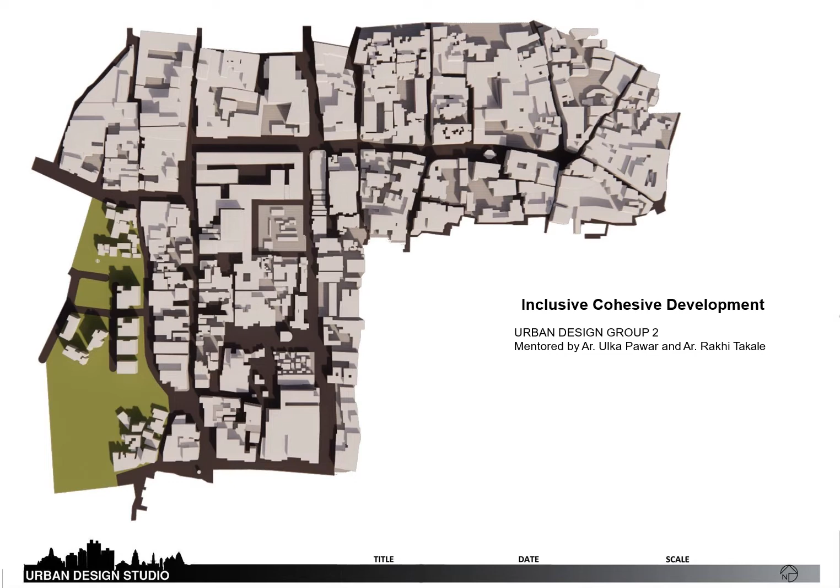Introduction. The site has a large cultural, religious, and social significance to the city. The activities that occur in the site and in the vicinity play an important role in binding the city together. The aim of this studio is to understand the existing city fabric and analyze the activities and the role they play in forming the existing nature of the site.

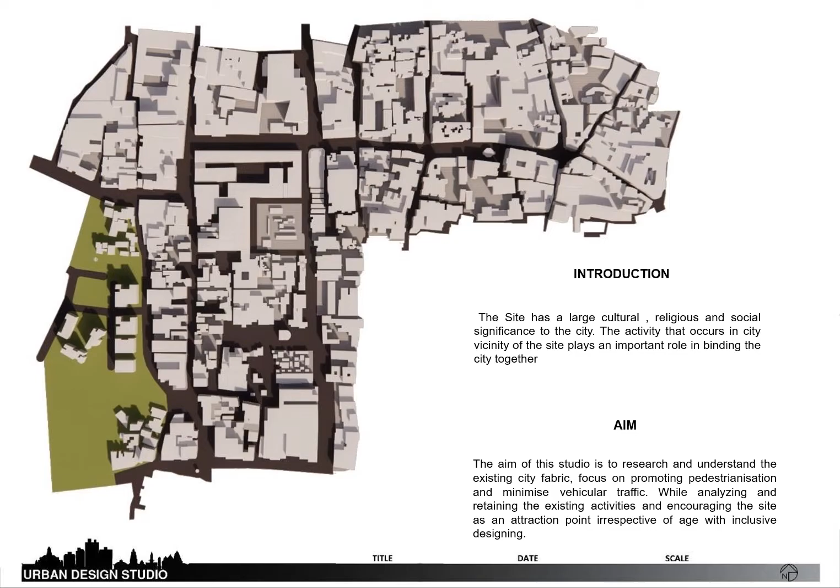Site location. The site is located in Old Nashik. The area starts from Patel Colony to Gadge Maharaj Chowk, extended till Tiwandha. The site is the commercial core of the city, with a lot of historical, cultural, and social significance. This area has heavy footfall due to continuous commercialization, along with religious factors. Due to high cultural and religious relevance from Damodar Theatre, Sakshi Ganpati Temple, Bhadrakali Temple, Buddha Halwai, Bhadrakali Ganpati Raja, and the Relief Road, commercialization has increased at a remarkable rate.

Visual documentation. When talking about cultural significance, many structures like Vijayanand and Damodar Theatre, Madhukar Talkies, and Buddha Halwai come into picture. These structures hold historical importance which contributes to the site till date. When talking about religious importance, Sakshi Ganpati Temple and Bhadrakali Temple are known widely. These still hold the same importance as they held in older times, gathering crowds from all over the city.

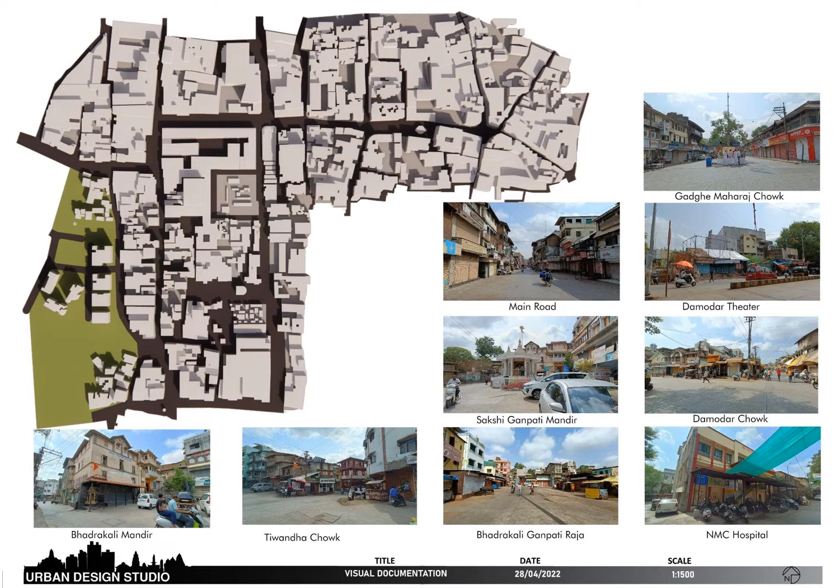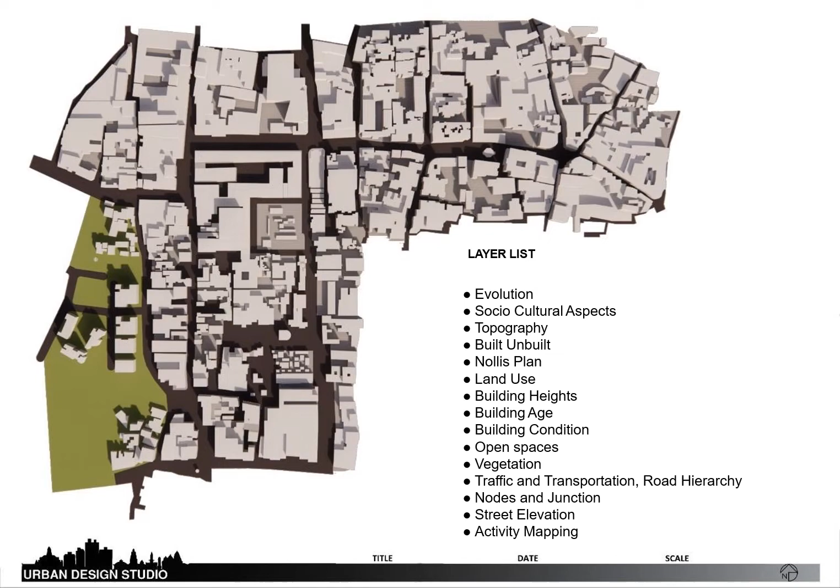Detailed documentation of the site was done with the help of various layers of documentation. Evolution helps us understand the social, cultural and political influences on the site. It aids in understanding the people and their lifestyle and how they adapt according to change over the period of time.

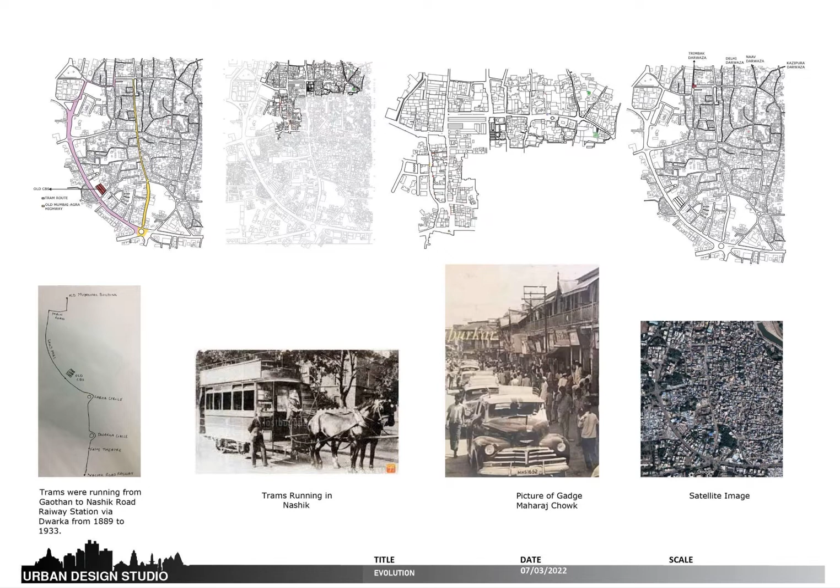Around 400 years ago, Maratha, Jain, and Rajasthani people started to settle near the bank of the Godavari. The Rajasthani people used to offer religious rituals. Thus, the settlement started to spread from the bank of the Godavari towards the south. The planning of the houses was closely combined and inclusive.

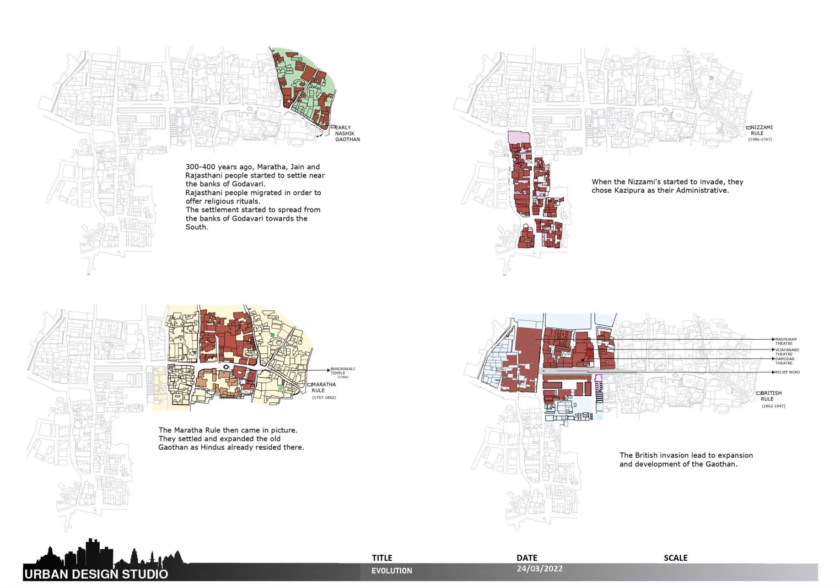When Nizam Shah invaded in 1586, he chose Kazipura as their administration post. Thus, the settlement along Kazipura started in 1707. Maratha rule came into the picture and started to settle along the river bank. They shifted the Bhadrakali temples towards Tiwandha. The administration building from the Peshwa was Sarkar Wada in Saraf Bazar. They developed the river bank and made it a replica of Kashi. Thus today, Nashik holds religious importance as a city.

Social culture. Social cultural layers help us in understanding the cultural evolution of the site. Social cultural aspects include various traditions that change or evolve with time. These various aspects include entertainment, food, lifestyle, and many more. The whole city still retains a vibrant network of culture.

The belief of the people doesn't just get reflected by the built form but also by the day-to-day lives of the people. Various cultural and religious festivals like Rang Panchami, Shiv Jayanti, Ganesh Chaturthi and Eid take place all over the city with different vibrancy, playing an important role in connecting the whole city together. The city has various market lanes in its vicinity, which cater to day-to-day needs and are affordable and cheaper compared to the modern market.

Topography. The topography study gives us information about the contours and the building techniques used due to the contours. Due to the variation in contours, retaining walls are constructed in the site to retain the soil and keep the houses secure from storm water. Use of steps on steeper slopes provides easy accessibility to the houses, and the plinths counter the slope and secure the houses from storm water.

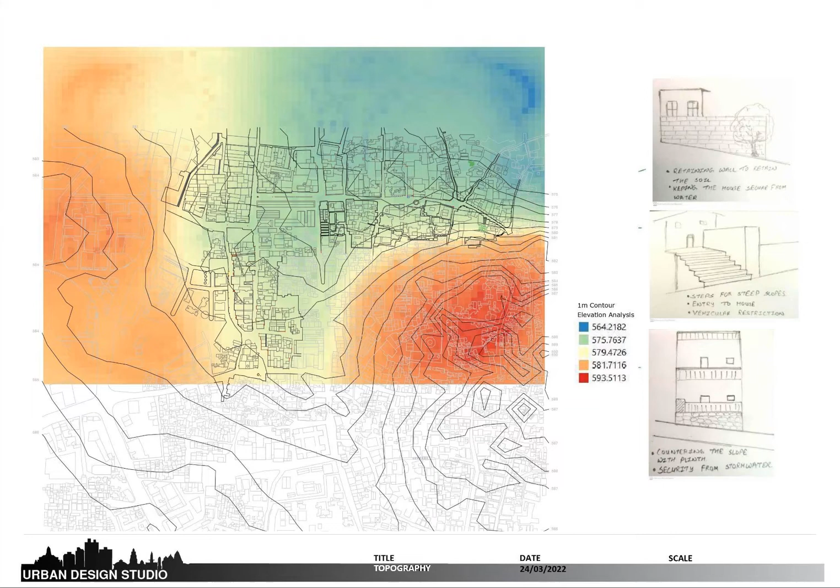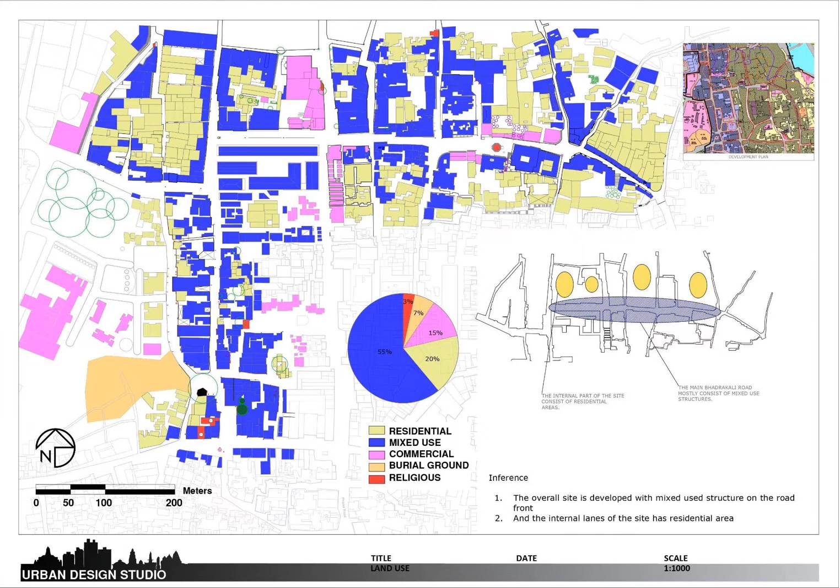Land use mapping. From this layer study, we understand the typology of the built mass and get an idea of the proposals that can be made. Building heights. The height of the structures across the overall site is quite overpowering, due to which streets are shaded.

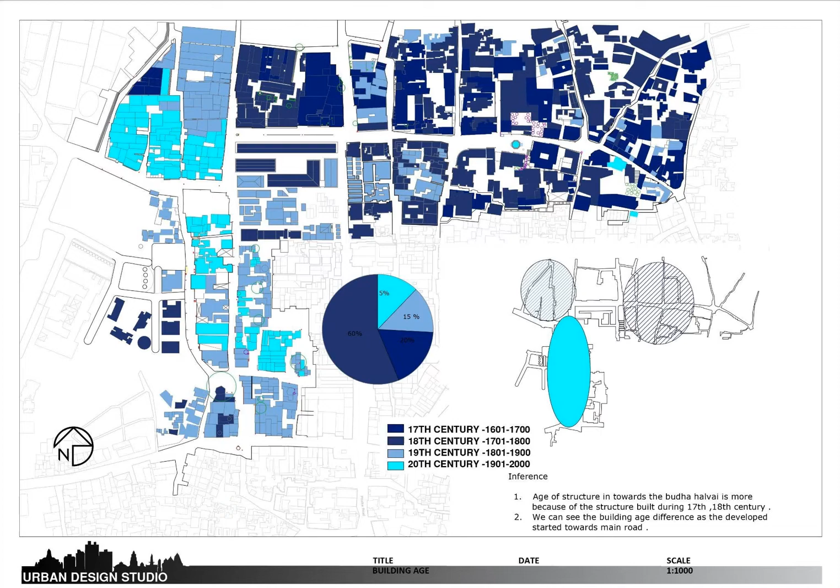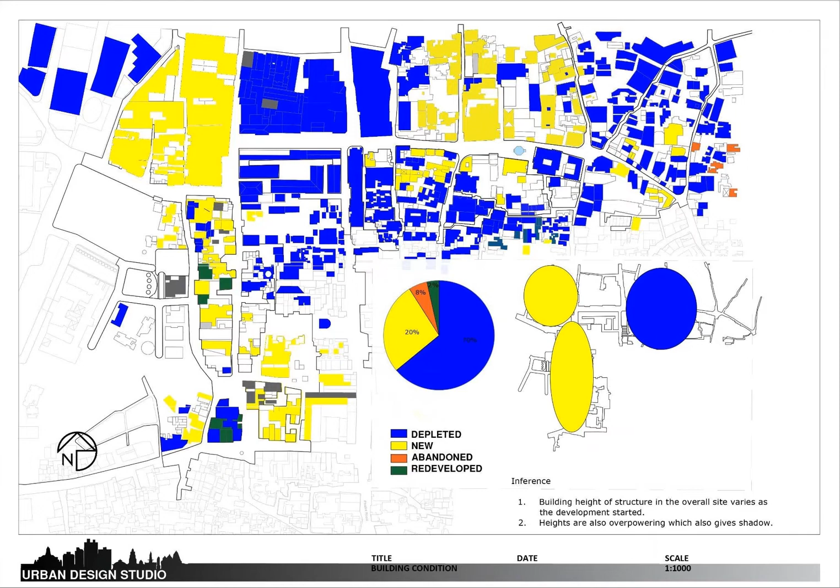Building age. By this layer we understand the historical background and the development of the site. Building condition. This layer helps us understand the history of the structure and also gives us an idea of which structures can be conserved or redeveloped.

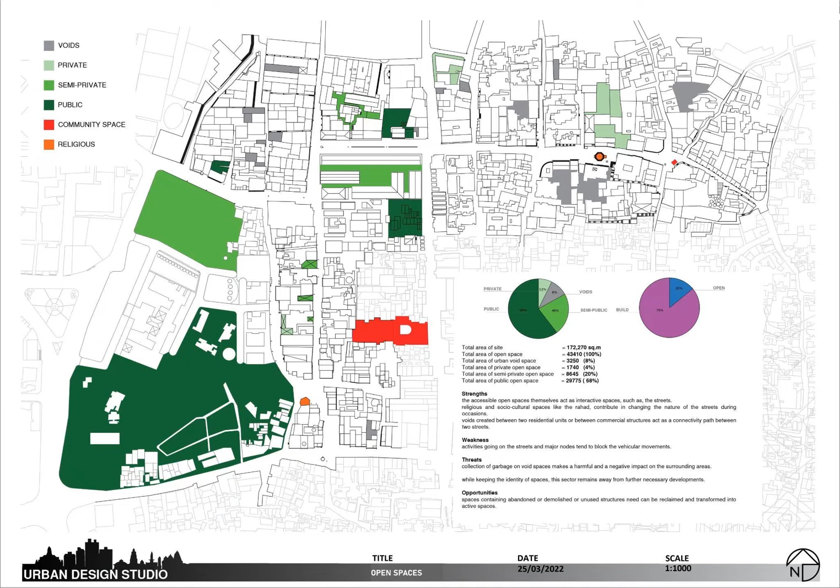Open spaces. The accessible open spaces themselves act as interactive spaces such as the streets. Though the site contains a large amount of public area, it cannot be used for public purposes. One major open space is the Rasul Bagh graveyard, which cannot be accessed by women. There are also several such open spaces which are not in function, hence there is a need for dedicated open spaces like community spaces which would be used without any blockage of vehicular movement on the streets, and which would provide a safer place for children for their outdoor games and activities.

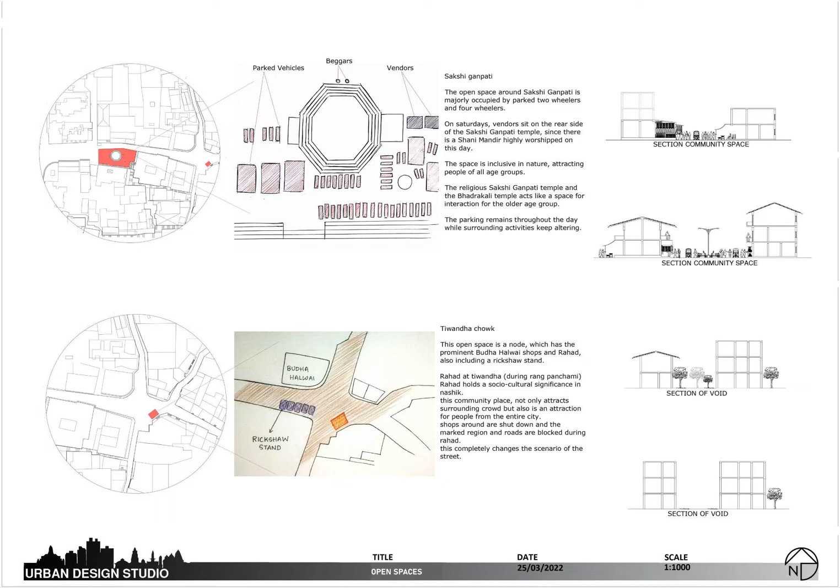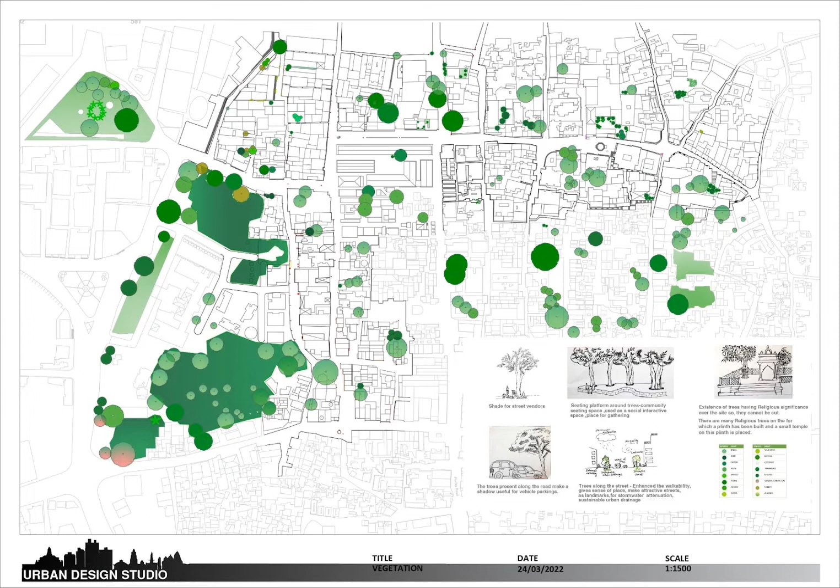Vegetation. The vegetation study tells us about the social spaces in the site and the areas where dense and sparse vegetation is present. Trees are an important element on the site as they not only act as an aesthetic element but also as a shading device. Trees enhance walkability, make streets more attractive, act as a landmark and aid urban drainage. Specific trees help in improving air quality.

Traffic and transportation. The city is connected to the site by public as well as private transportation. This helps us understand the vehicular movement and congestion occurring on the site. The main city connections are the Mumbai-Agra Highway, Trimbak Road, Peth Road and Dindori Road.

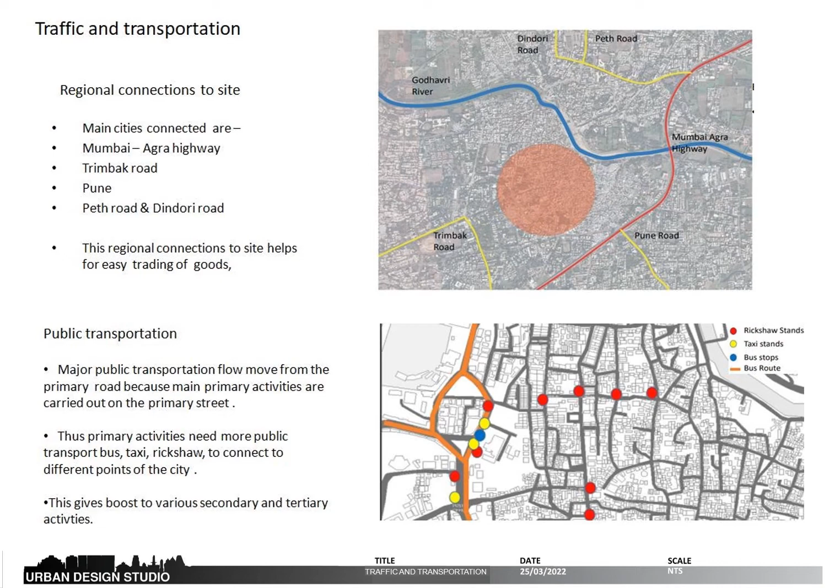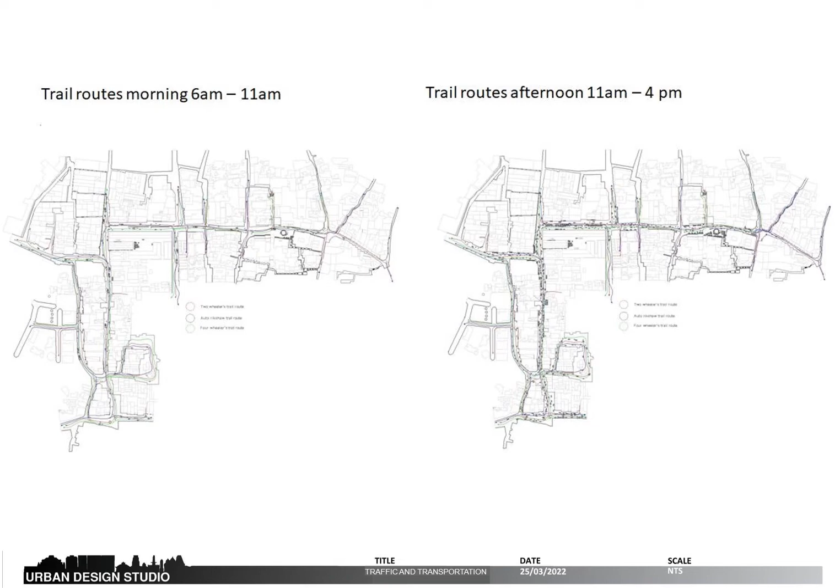The road hierarchy gives us an idea of vehicular and pedestrian movement. The public traffic flow starts from 11 a.m., while loading and unloading of goods in the shops happens till 10 a.m. The peak hours start from 4 p.m. in the evening till 9 p.m. During that time vehicular density increases and parking on the street increases in front of the shops.

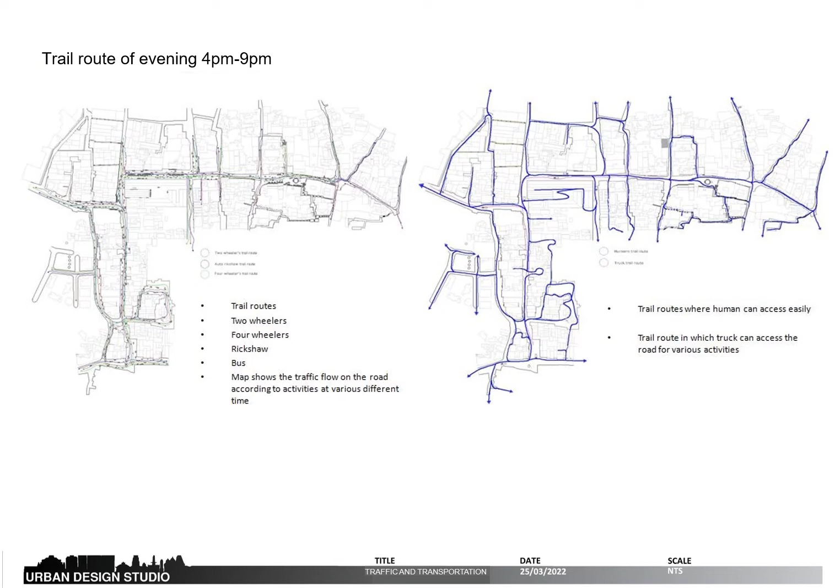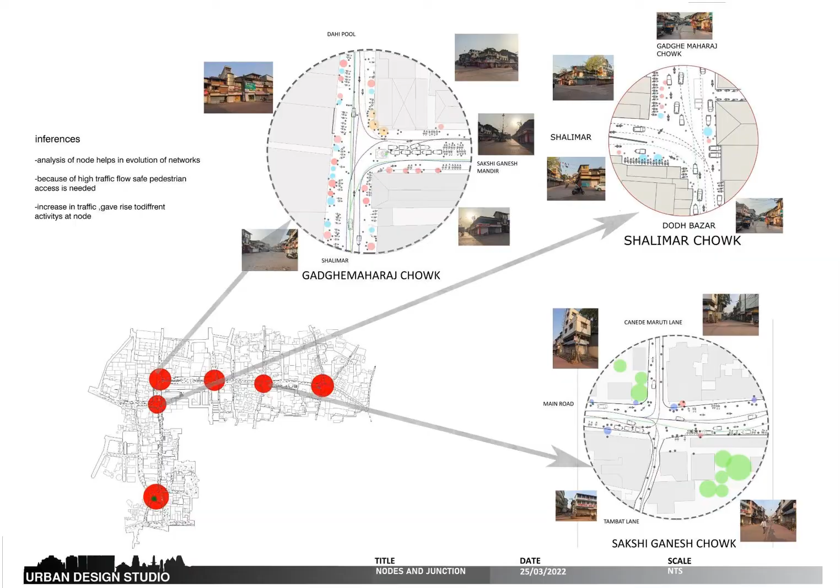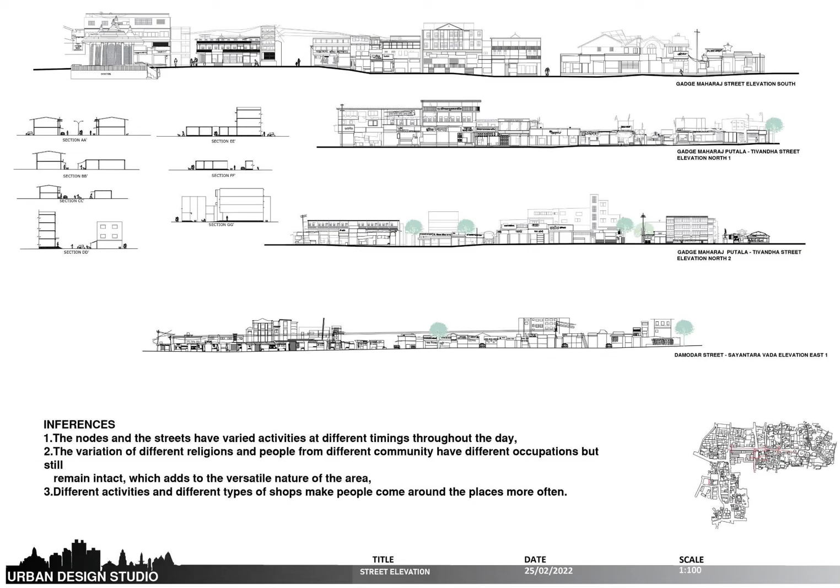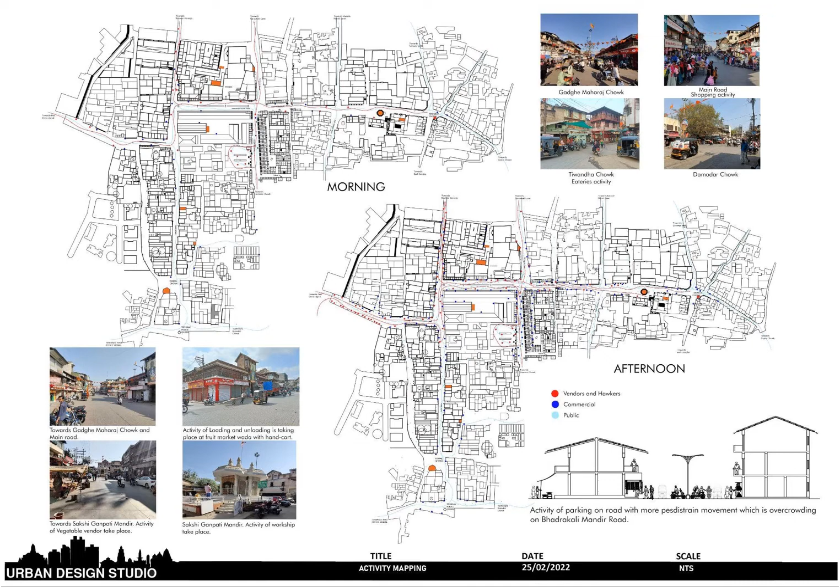Activity mapping. The activity map on the road shows the movement between the crowd and various activities throughout the day. In the morning, activities like loading and unloading of trucks, setting up of the vegetable market, and hawkers setting up their carts take place. In the afternoon, public flow starts to increase and congestion slowly begins, though vehicular movement still happens in flow due to less crowd on the street.

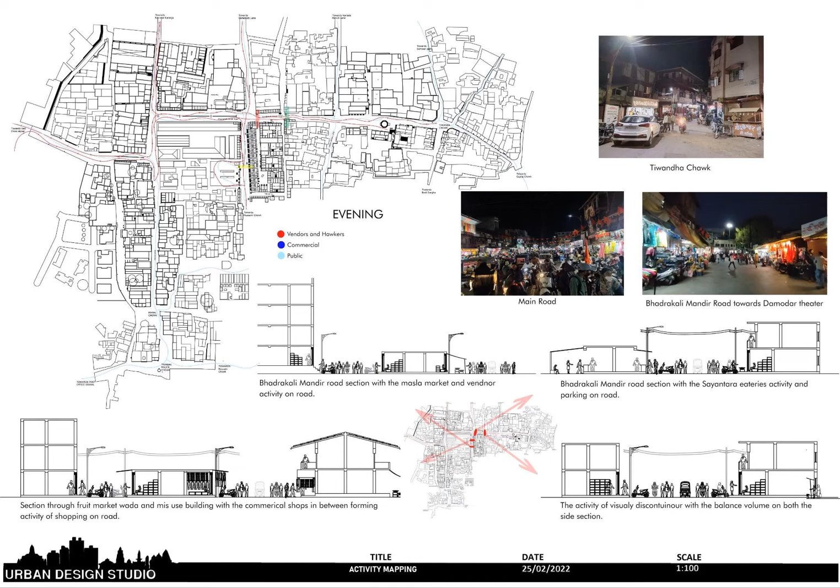In the evening, the site is at its peak point. This leads to congestion due to pedestrian flow, making vehicular movement difficult. The site is well known for its commercial activity, which attracts people due to the variety of goods at an affordable price. The streets are mixed with the interdependency of hawkers and shop owners, which helps in commercialization.

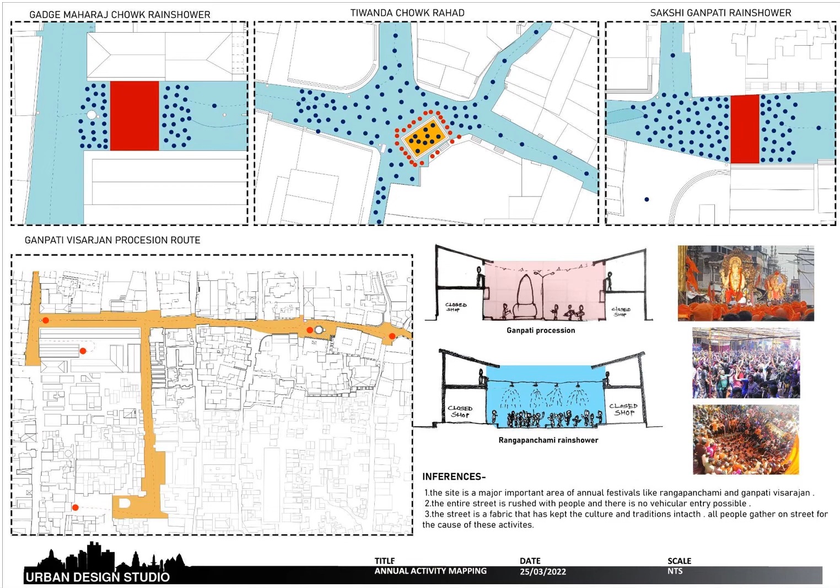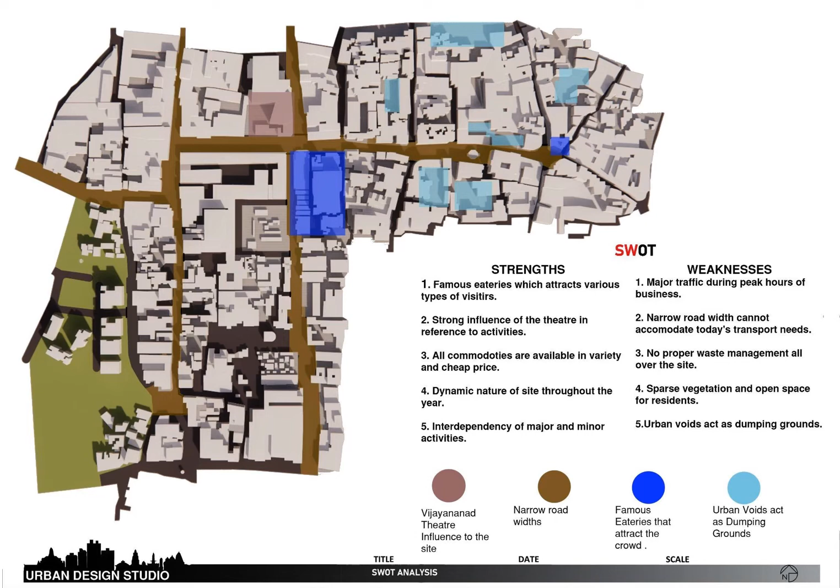The SWOT analysis of the site is done to understand the existing issues and provide solutions for the same. Some identified issues are heavy footfall on narrow streets causing congestion due to high vehicular and pedestrian movement, encroachment of vendors disturbing walkability, historical landmarks not being conserved, and lack of public toilets which doesn't allow people to stay for a longer time.

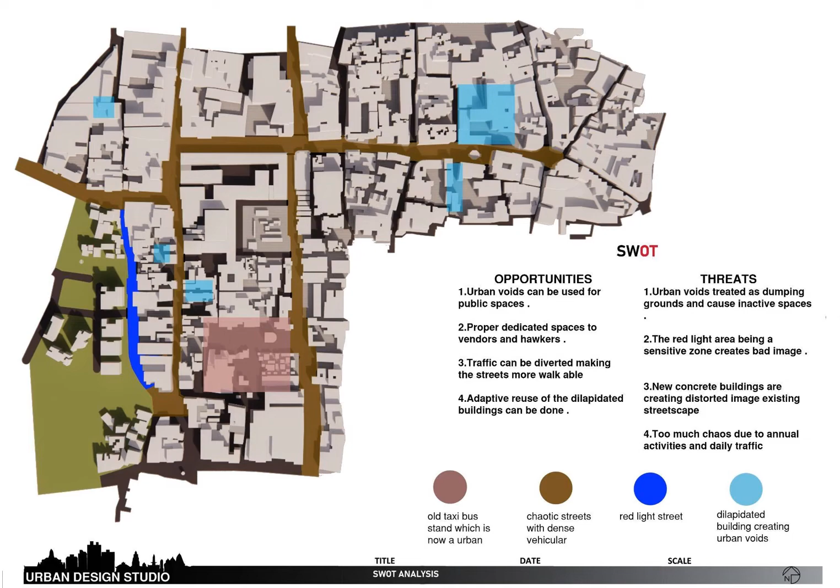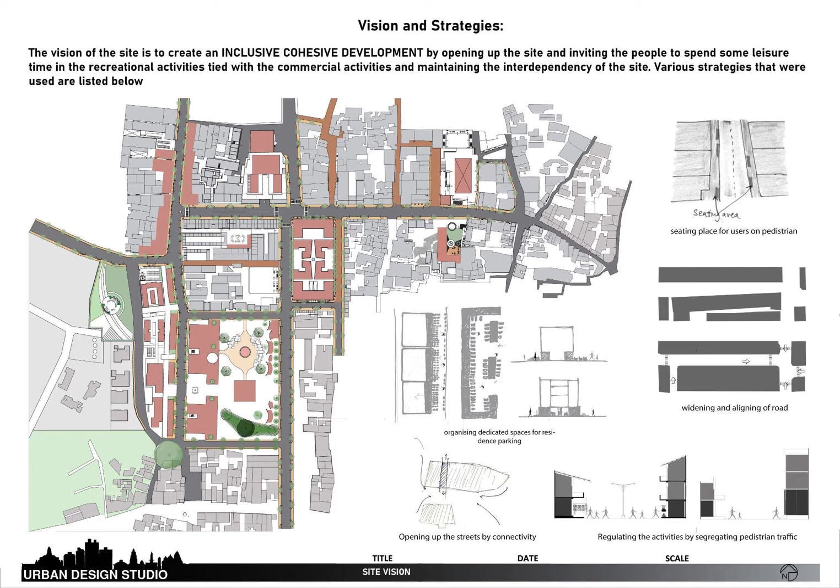The structure plan shows the ideas and design interventions proposed for the site to make it more wide-ranging. These interventions are changes in the built form while keeping the existing essence of the street. Some proposals include redeveloping the mixed-use buildings along the street to enhance people's experience, transforming the old fabric into a public trail, uplifting the red light area and providing opportunities for them, and retaining the commercial complex while shifting the residences to the upper floors.

The site is opened up to all age groups, and pause points are created all over the site, bringing back the essence of the cultural performing theatre.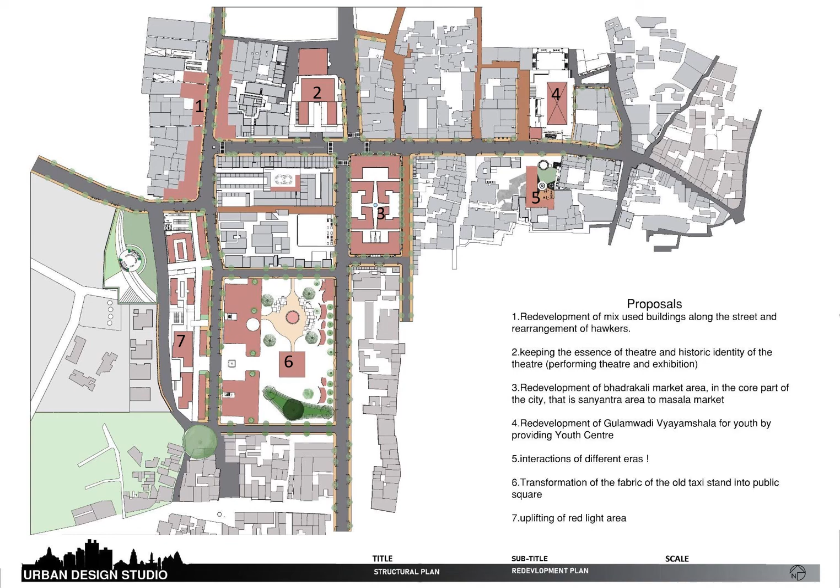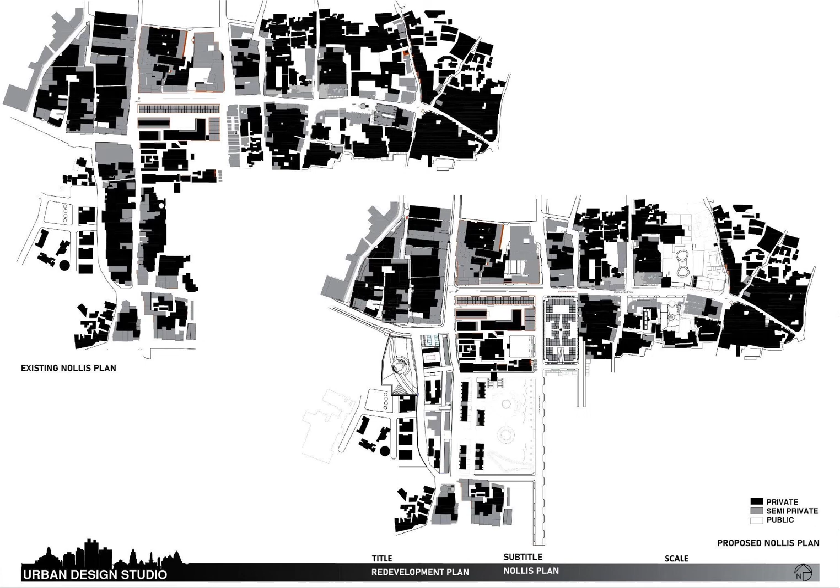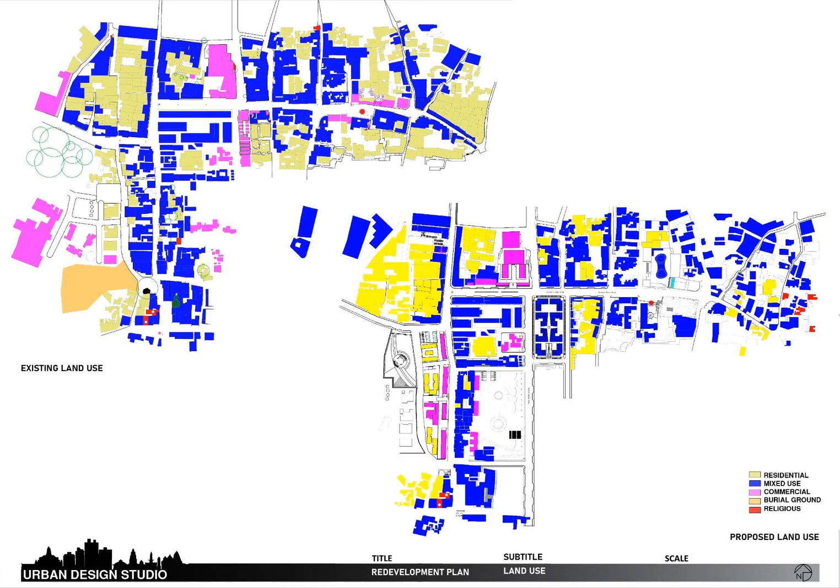This is the comparative analysis of the existing site and the proposed structure plan. Here we can see our attempt to make the site more inclusive and wide-ranging for the complete city. We have kept the commercial and mixed-use activities on the street in order to help increase the footfall.